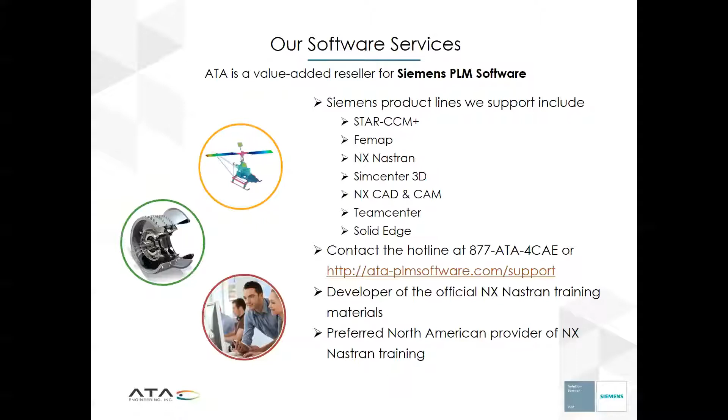In addition, we can help with license sales, and we offer a variety of classes, with topics ranging from introductions to FEMAP and FEA to more advanced topics like dynamic response, super elements, optimization, and more. The full schedule of classes can be found on our website, and you can even request custom classes.

Speaking of our software website, here it is. As we've discussed, it houses the full list of upcoming classes, and it can be used to contact our software support hotline. In addition, it has software product information and brochures, as well as links to download free trials.

My favorite part has to be the growing collection of free resources. They're all developed by our engineers, and they're aimed at our customers' needs. These include white papers, training videos, tutorials, and APIs. And I'd invite you to check these out after the webinar wraps up.

Now, before we get too much farther into the presentation today, I think it's helpful to frame STAR-CCM Plus inside the larger SimCenter portfolio. The SimCenter portfolio is a comprehensive suite of simulation software and test solutions, which includes FEMAP, NX, and NX Nastran, as well as many other products.

Together, they can help your company address the engineering challenges of today's complex products. SimCenter combines simulation and physical testing with intelligent reporting and data analytics to produce digital twins that more accurately predict product performance and drive innovation throughout all stages of the product development cycle.

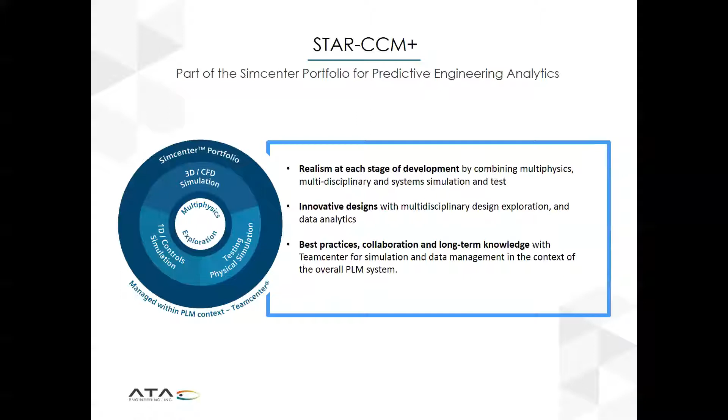Within SimCenter, STAR-CCM Plus is a powerful multi-physics simulation tool that uniquely integrates a wide range of physics with intelligent design exploration in a single end-to-end environment.

This, combined with workflow automation and efficient parallel computing, enables engineers to conduct analysis and exploration of real-world problems, resulting in better design decisions earlier in the development process.

The value of such a powerful solution is evident in this customer reference from Jaguar Land Rover in the UK. They do all their HVAC product development and testing using digital simulation without physical testing, which allows them to evaluate more designs earlier in the design process, leading to better design choices, reduced time to market, and significant cost savings.

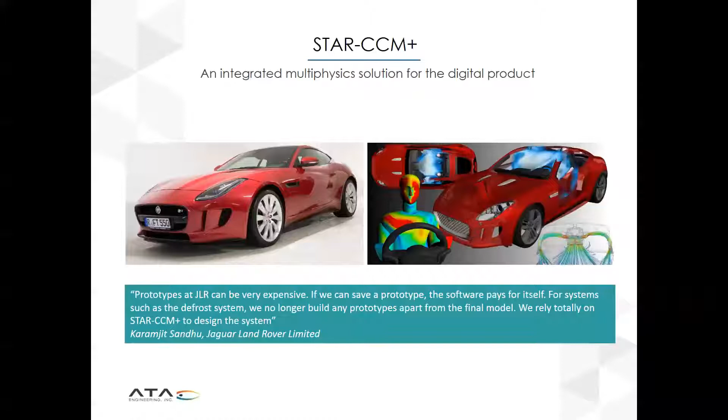STAR-CCM Plus is able to achieve all this by delivering the following 6 key elements: realism with validated models that cover a broad range of disciplines in physics, productivity with repeatable and robust workflows, efficiency with high-performance computing capabilities and affordable licensing options,

innovation with automated design and exploration and optimization, responsiveness with technology leadership and an aggressive development schedule, and success with dedicated customer support backed by a team of global experts.

So looking through those 6 in a little more detail, let's begin with realism. STAR-CCM Plus is much more than an industry-leading CFD code. It's really a best-in-class simulation tool that provides a comprehensive set of physics models.

All of these capabilities are accessed from a single integrated environment, eliminating the need to learn and connect multiple tools. It offers both finite element and finite volume methods, allowing for the most appropriate numerical schemes for the physics being modeled. And STAR-CCM Plus can be coupled with third-party codes, giving you the flexibility to use the right tool for the job.

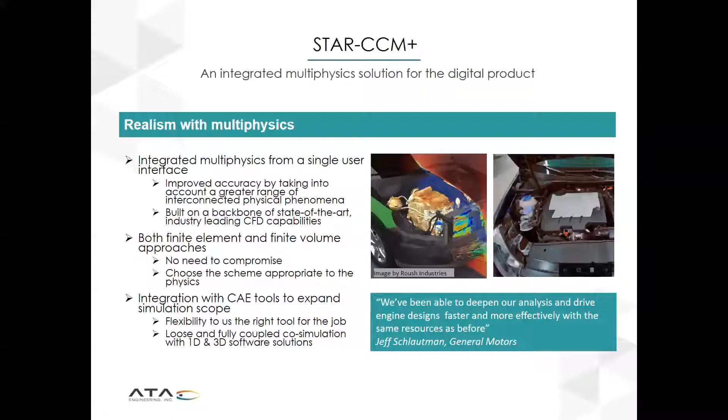STAR-CCM Plus helps cover your complete application scope in a single user interface by offering a broad range of validated models that simulate a variety of disciplines in physics, including those listed here. This slide is just a snapshot of the many industries and applications that STAR-CCM Plus can support.

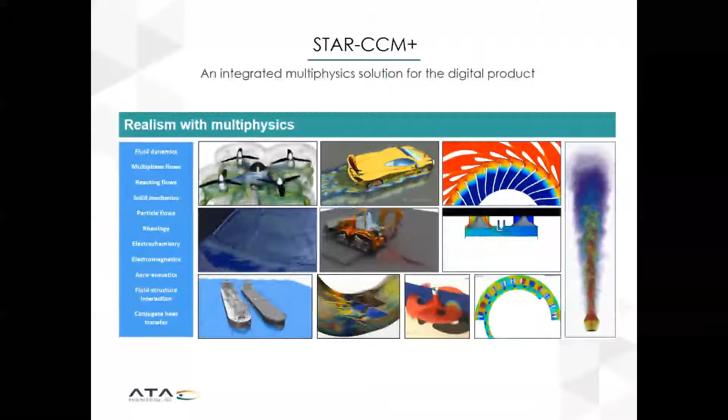On the productivity front, STAR-CCM+ enables every simulation model to be built using a repeatable and robust workflow, allowing models to be easily reused and updated to investigate a full range of design configurations and operating scenarios with minimal manual effort. Simulation models can even be templated, allowing best practices to be easily shared across your organization.

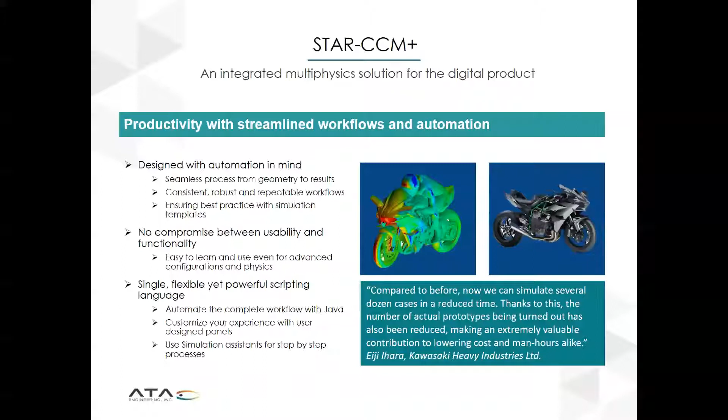STAR-CCM+ is easy to learn and use, even for advanced configurations and physics, so there's no need to compromise between usability and functionality. It can be linked with CAD and PLM software so that geometry updates are automatically represented in the simulation, and it uses a single scripting language that allows you to completely automate your workflow, customize your experience, or set up a step-by-step process with simulation assistants.

STAR-CCM+ also delivers efficiency through high-performance computing to ensure that you can maximize the value of your hardware and fully leverage your investment in simulation. It has been developed with scalability in mind, offering solvers that scale to hundreds of thousands of cores and parallel meshing that reduces turnaround time by enabling mesh generation on clusters. STAR-CCM+ also offers a range of affordable and customizable license options to meet your simulation needs and throughput requirements.

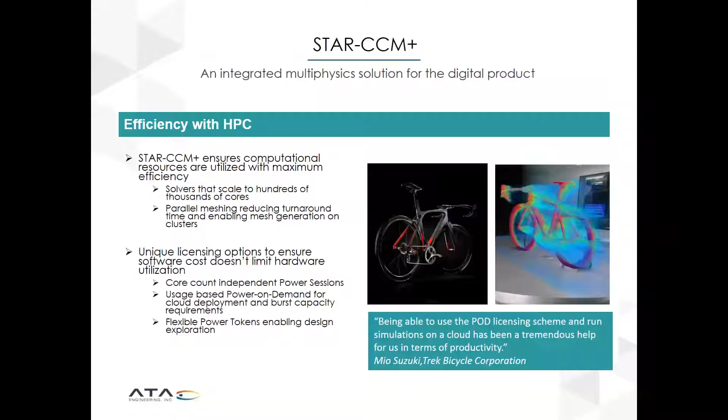STAR-CCM+ allows for rapid innovation with built-in design exploration and optimization. Design Manager enables users to set up and automatically perform parameter studies within STAR-CCM+ to evaluate families of designs, and users can take it one step further with the STAR Innovate add-on, which allows for single and multi-objective optimization studies that intelligently search the design space to identify the best designs using the trusted HEEDS technology.

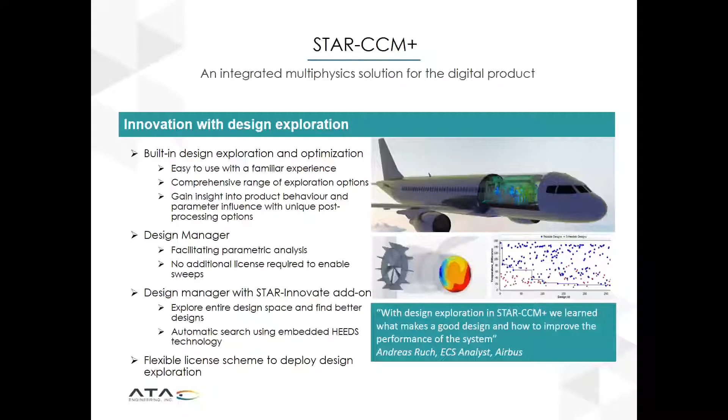To maintain a robust and efficient simulation process, STAR-CCM+ has a long history of technology leadership, and it brings an aggressive development schedule, including three major releases each year that continuously deliver innovative technologies to respond to evolving simulation needs. Current users have the ability to influence the development of STAR-CCM+ as well to meet immediate and anticipated simulation requirements.

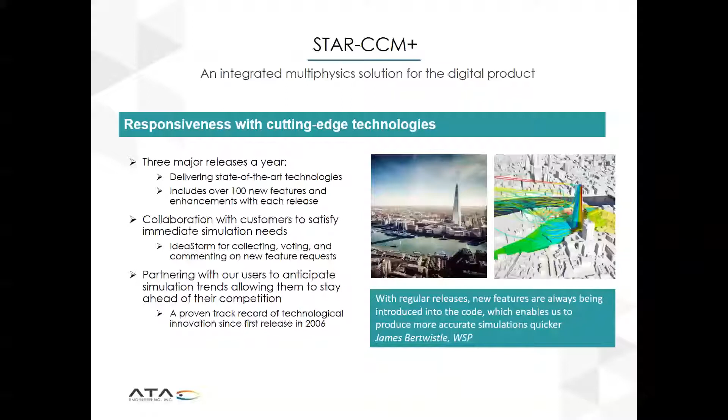And finally, STAR-CCM+ brings its users world-class customer support through the dedicated support engineer system. Your DSE will understand your needs as a customer and draw on subject matter experts inside Siemens PLM to provide the solutions to your challenges. In addition, a 24/7 customer portal provides access to knowledge base articles, a technical forum to exchange ideas and help other users, and downloads of new software versions as soon as they're released.

As you can see, there's really a lot to be excited about with STAR-CCM+, but without too much more delay, I think I'll go ahead and hand it over to Parthiv for our next presentation.

Great, thank you, Jonathan. And thanks again to everyone for attending today's webinar. So can everyone hear me okay? Jonathan, am I coming out clearly on the audio? Yep, you sound good to me.

Great. So I'll next talk about an application of STAR-CCM+. We'll talk about how ATA applied these advanced computational fluid dynamics methods in STAR-CCM+ to support NASA Jet Propulsion Laboratory in the design of key sample collecting hardware for the upcoming Mars 2020 mission.

So again, my name is Parthiv Shah. I am a senior technical advisor at ATA, and I'm the technical director of our fluid dynamics and propulsion discipline area.

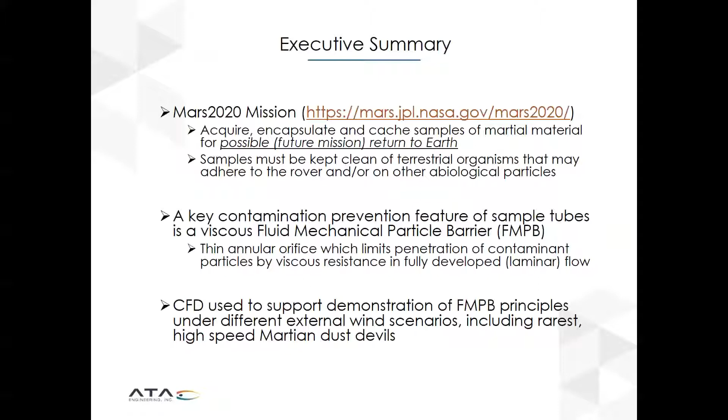The Mars 2020 mission is part of NASA's Mars Exploration Program. It has a number of science goals that you can read about in greater detail on the website listed here. Among the primary science goals is to characterize processes that formed and modified the geological record within the exploration area.

Another key goal is to do astrobiologically relevant investigations on materials at the landing site and to assemble documented, cached samples for a possible return to Earth.

The rover itself leverages a lot of design and technology from the 2012 Curiosity rover. As I said before, acquiring, encapsulating, and caching are what's new, and therefore the astrobiologists have these stringent requirements to ensure that the samples don't get contaminated.

By contamination, we mean that terrestrial particles can carry biological signatures on them, which, as I understand, can actually survive the harsh environments of the journey, including going dormant, and then possibly contaminating the actual sample itself.

So on the next slide, I'll give a few more details on the Mars 2020 mission. The launch window occurs over a few weeks in the summer of 2020, around late July to early August. In general, these launch windows to Mars occur cyclically every 26 months or so. After the launch vehicle separates, the rover, encased in an aeroshell, cruises to the Red Planet for over seven months, arriving around February of 2021.

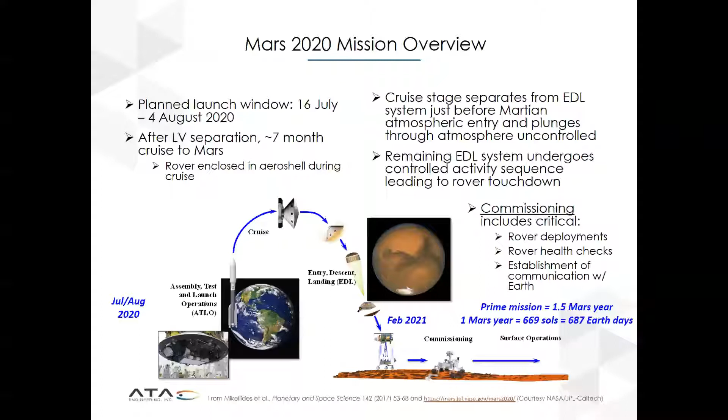Okay, so now I'll talk about some of the key hardware related to the sample caching system, which is part of the rover. This includes a robotic arm, the turret, and the adaptive caching assembly, which is the hardware used to inspect, encapsulate, and drop samples onto the Martian surface.

As you can see, it's a very complex assembly from this picture. It has a carousel for the various bits used to drill into the Martian soil, and it has assemblies responsible for storing, handling, and sealing the tubes. Additionally, there are various stations where the samples could be handled or analyzed.

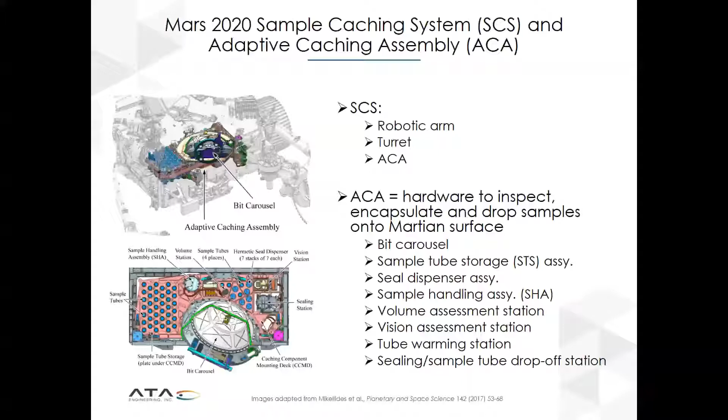Within the sample tube storage assembly, which contains the empty sample tubes, is where we have the feature that the CFD simulations were performed on, the FMPB.

So once the rover's landed, certain deployments occur. They introduce airflows to remove molecular contaminants from some outgassing hardware, and additionally the doors of the bit carousel open, having been closed prior to this.

So the sample tube storage contains the sterilized sample tubes and the seals, which are going to be protected by this FMPB glove, this fluid mechanical particle barrier glove.

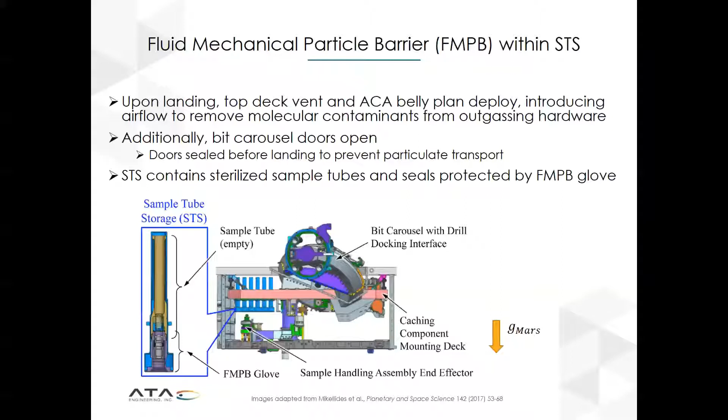Okay, so this slide covers the operational principles of this glove, and they're somewhat straightforward.

So there's a chance of particle penetration in the tube if there's a net inflow driven by a pressure difference, or some sort of a Martian wind event. And so the FMPB glove separates the tubes from the external environment by a pair of thin orifice and cavity pairs that are arranged in series.

It's the narrow gap in these orifices that result in the fluid viscosity assisting to retard the addition of this mass into the system. So the key engineering requirement is to size this orifice to prevent any large particles from entering outright, and ensure that any small particles penetrate no farther than a certain distance within the orifice itself.

And so eventually these particles would then be able to fall under Martian gravity. As indicated here, gravity will be pointing down when the rover is on the surface of Mars.

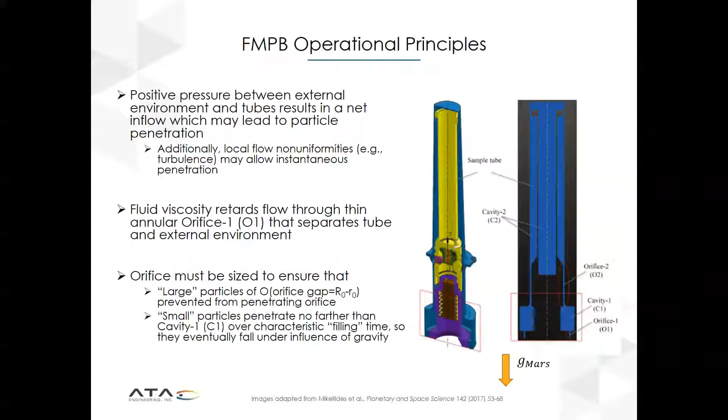So NASA JPL, who managed the overall project, took a multi-fidelity approach to substantiating that the design of the FMPB was sufficient. That included first principles analytical modeling, having ATA perform 2D and 3D CFD simulations which included Lagrangian particle tracking, and laboratory water tunnel testing. Over the next slides, I'll describe these three efforts, which together help substantiate the FMPB design.

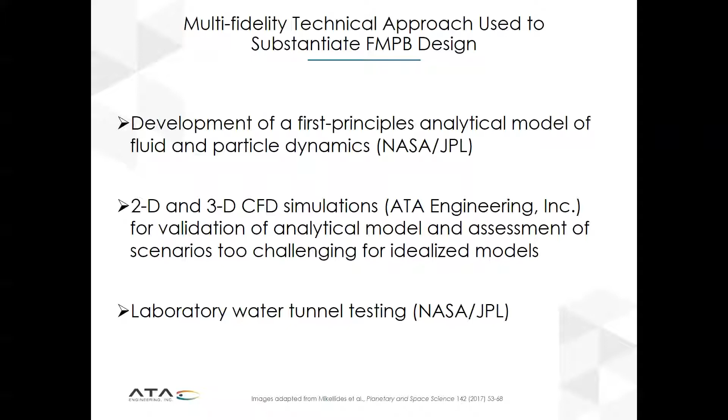Okay, so on the modeling front, the flow is essentially modeled as a network of orifice and cavity pairs, with each orifice having a resistance due to a locally fully developed flow.

So it can be established from first principles that the flow rate will be in proportion to the driving pressure, and that the rate of change of pressure in each of the cavities will be proportional to the mass addition, which could then be related back to the driving pressure difference.

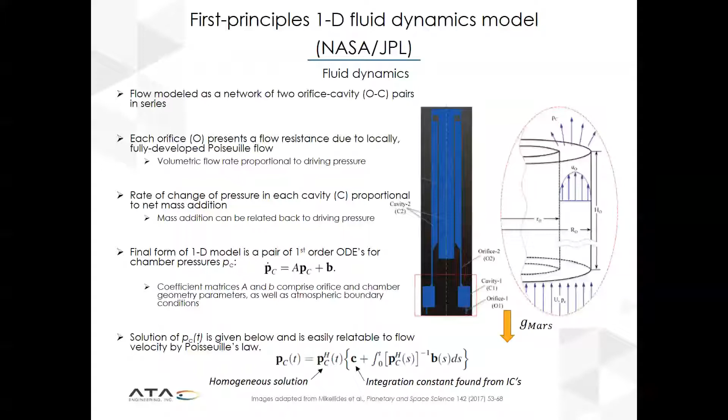And so in this way, the model becomes a pair of one-dimensional ordinary differential equations for the chamber pressure, and the coefficients are defined by the geometry and the atmospheric reference pressure. These systems were solved using a numerical integration tool. So that was the analytical model.

The model for the flow then establishes what the trajectory of these biological particles could be by essentially solving F equals ma. With dimensional analysis, it was found that the forces become a balance between the drag forces due to the pressurization or the wind acting on these particles and the Martian gravity.

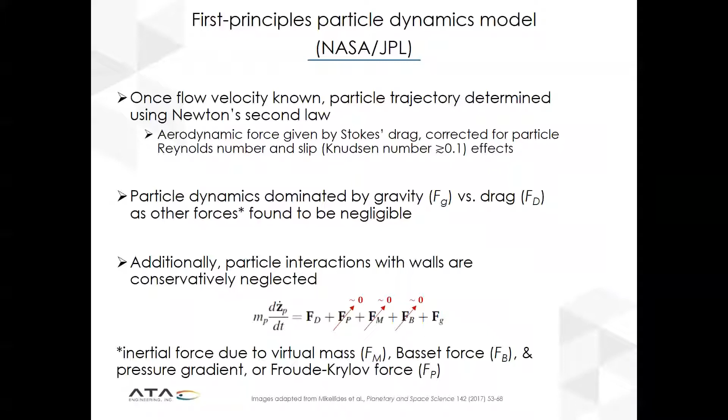So this is where ATA's role came in, performing CFD in order to substantiate these analytical models for JPL, or help substantiate them. We use STAR-CCM+, and we perform time-accurate, low Mach number CFD simulations using an ideal gas assumption to simulate the Martian atmosphere. Here in the picture, you see an example of some of the computational domains.

We did both 2D and 3D time-accurate simulations, and they included the fluid mechanical particle barrier and the sample tube cavity flow path, as well as some of the external fluid around that device.

We took advantage of STAR-CCM's unstructured hexahedral trim meshing generator, which would allow us to get adequate resolution in the critical areas, such as orifices, while also making the simulations very computationally efficient.

And in addition to simulating the flow itself, STAR-CCM+ allows you to simulate the particle dynamics through a Lagrangian framework, and that was used to quantify the particle's penetration.

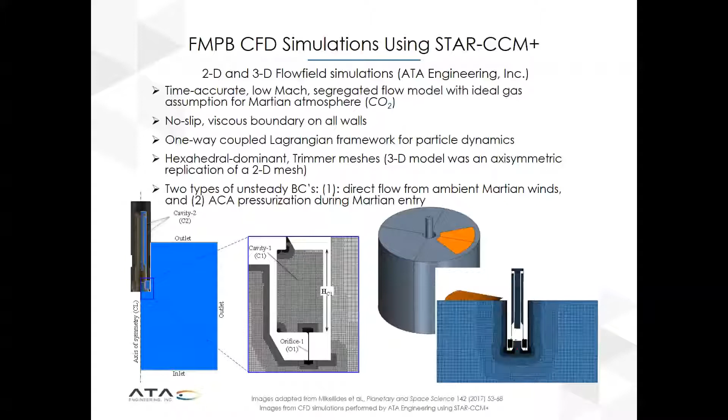So this slide here just shows some early results, which were used to show that the CFD results match the analytical model well. On the left, we show that there was good agreement with the cavity pressurization time history, and on the right, we found there was also good agreement for the penetration of 0.3 micron particles over a range of external wind speeds.

And so this certainly gave us confidence that the model itself that was assumed for this system was appropriate.

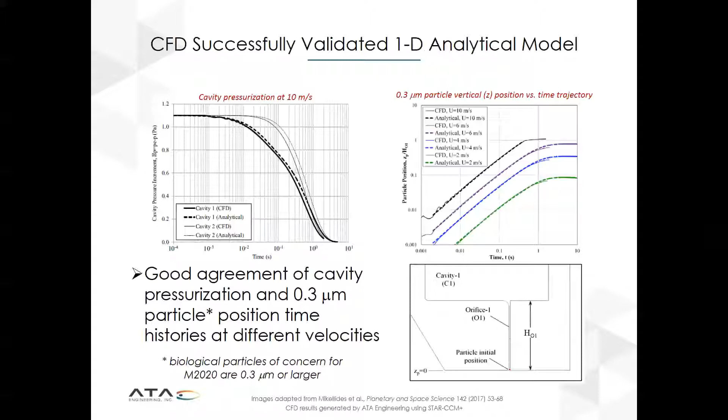Now, as I mentioned, STAR-CCM+ has the ability to simulate Lagrangian particles. This slide shows an example of that capability under the influence of Martian gravity. So you'll see this animation that's looping. In general, these simulations were performed for both a sudden pressurization and also a direct flow type of event that may occur from a Martian wind.

In these simulations, groups of particles were made to appear periodically in time very close to the opening of the orifice. The animation I'm showing you is a direct flow simulation with a Martian wind of about 15 meters per second, which would represent one of the worst expected winds based on known data.

So you can see that the particles are being carried through the first orifice, but then they're getting arrested very near the cavity entrance, and eventually they will fall back due to their own gravity, which is downward in this visualization. You also can see that some of the particles end up recirculating just to the side of the body, which is interesting, but it's not directly a concern from the point of view of the performance objectives of the FMPB.

So here we're doing a fluid dynamic simulation, and because these particles are small, they're not directly coupled with the fluid dynamics, but they respond to the flow itself in a one-way sense. But STAR-CCM+ has the ability to run both one-way and two-way coupling with Lagrangian particles.

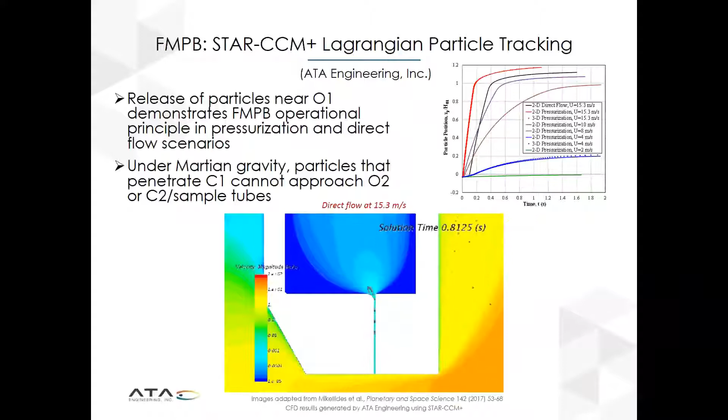Okay, so finally, the CFD and the modeling were also supplemented by some flow visualization that was performed at the Caltech water tunnel. The goal here was to investigate the role of asymmetries in terms of whether they could lead to noticeable penetration.

In general, the water tunnel can match the Reynolds number, but it cannot match the Stokes number, which is the ratio of the response times of the particles on Mars and the fluid. For this reason, the particles were not actually used in the water tunnel, but the penetration of the dye itself was used as a surrogate for particle penetration.

From these series of pictures, we find that at 0 degrees angle of attack, there was no dye penetration into the cavity. However, at a finite angle of attack, in this case 30 degrees, there was evidence of some dye penetration.

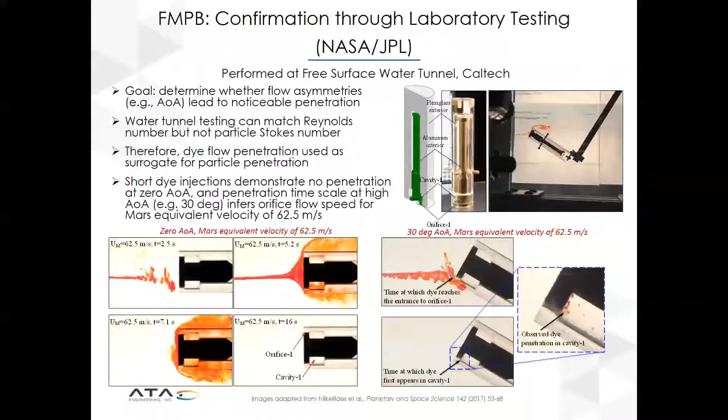The analysts could look at the timescales from the film and could infer that this penetration would only really occur for Martian wind speeds that were much, much higher than the worst case scenario expected on Mars. So this was another key aspect of risk reduction in this work.

Okay, so we built these models. There's a 1D analytical model, high fidelity CFD simulations to substantiate the model, and some water tunnel testing. The simulations were done under a set of assumed boundary conditions, and the next two slides discuss work that was done to determine whether the assumed flow boundary conditions themselves were reasonable.

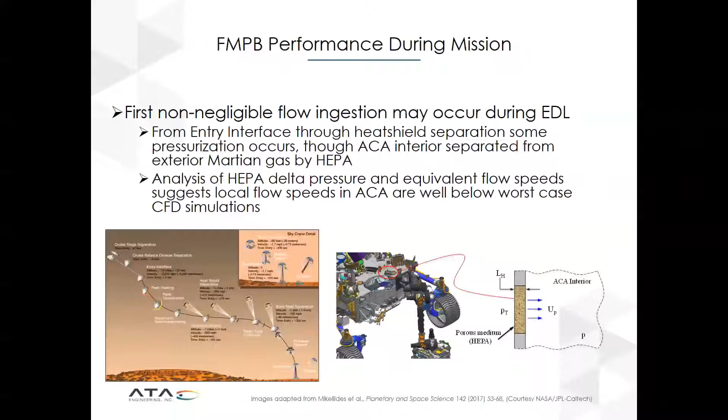Finally, during the rover surface operations, the adaptive caching assembly has its belly pan dropped, and there is the possibility of exposure to the Martian winds, which I mentioned before in the CFD simulations. So the question here is, could the Martian winds be large enough to theoretically create an adverse penetration event?

The way that this was addressed was using a defeatured model of the rover cavity. A statistical distribution of the Martian winds was taken from the 1976 Viking Lander 2 data, and that would help establish what the worst case scenarios were.

A simulation was performed assuming an atmospheric boundary layer over a highly defeatured version of the rover, which is essentially a box with an exposed cavity underneath, simulating the adaptive caching assembly with the belly pan open. Large eddy simulations were used to estimate what the local velocities would be.

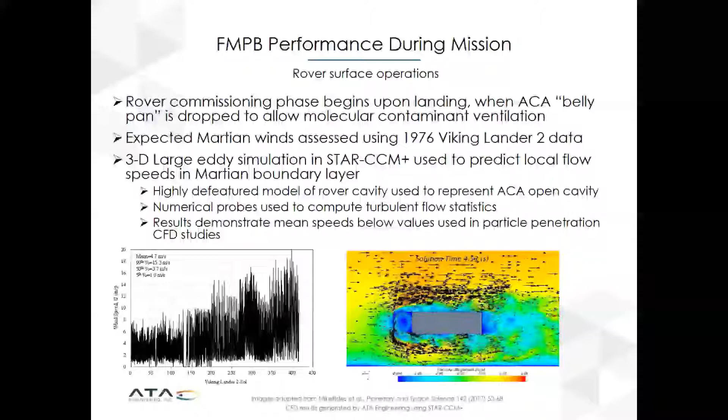Based on this, the 1D model could then be used by running the different statistical scenarios. So that kind of brings us to the end of the presentation.

Basically, the overall conclusions relate to how the fluid mechanical particle barrier was substantiated, how its operational principles were substantiated, in order to convince the designers, especially the astrobiologists, that in fact it would serve its purpose.

To summarize, the Mars 2020 mission leverages proven technology from the Mars Science Laboratory Curiosity mission, though the caching of samples creates a new and unique requirement from the standpoint of planetary protection. CFD in STAR-CCM+ was used to establish the operational principles of the FMPB, as well as to verify a first principles analytical model. This demonstrated that even in the 99th percentile nominal Martian wind, the penetration could be limited to a relatively short distance within the first FMPB orifice.